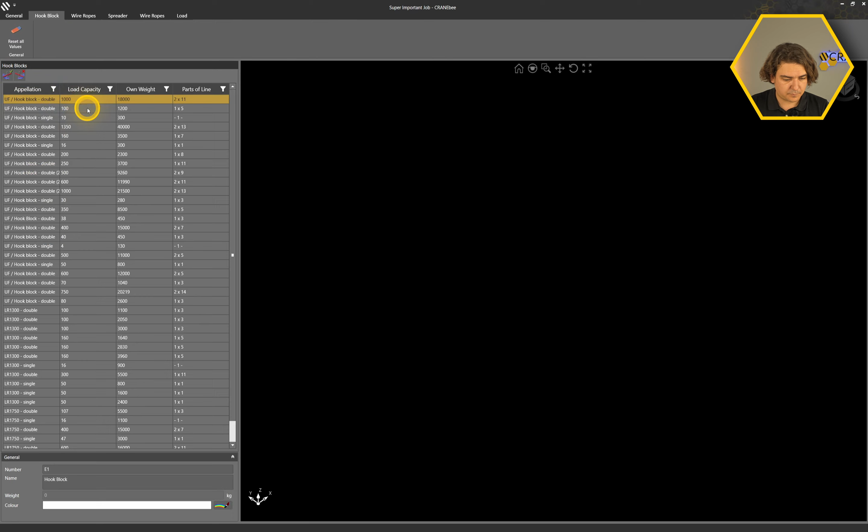And you see right away it will change the Explorer on the left. Let's start from the top to the bottom and then we do all step by step. Starting with the hook block. So there's a 450 ton crane. Let's put a 350 ton hook block on there. Yes, we can also put in a color. Let's make this one orange. And let's say we're done with this and move on.

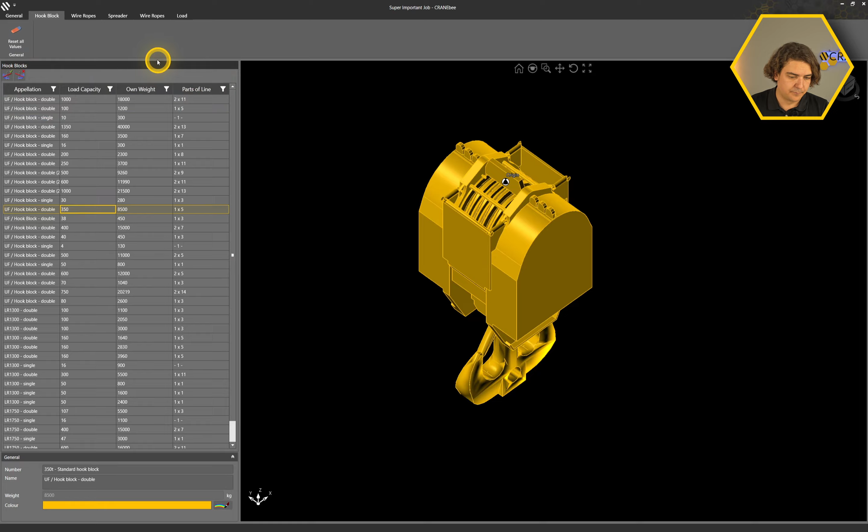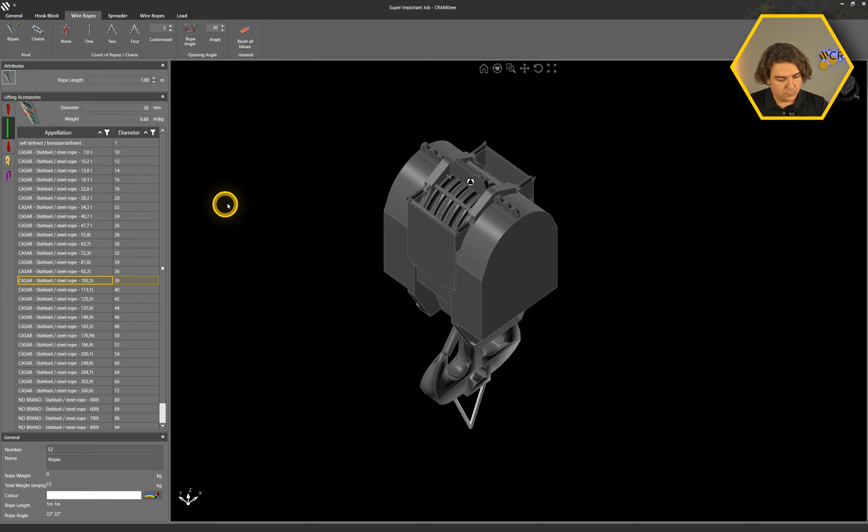By the way, if you want to rotate the lower part of the hook, you can do that up here on those little buttons. I keep them as is. Right. From this hook we have two wires. I'm gonna leave this very simple, so no additional accessories. I'm just gonna put in the wires. So let's put around 100 ton wires in. Doesn't show anything yet because we didn't select how many wires we want. In this case I want 2 wires, and you can see them down below connected to nothing yet. We can leave it like this for now and go ahead to the spreader.

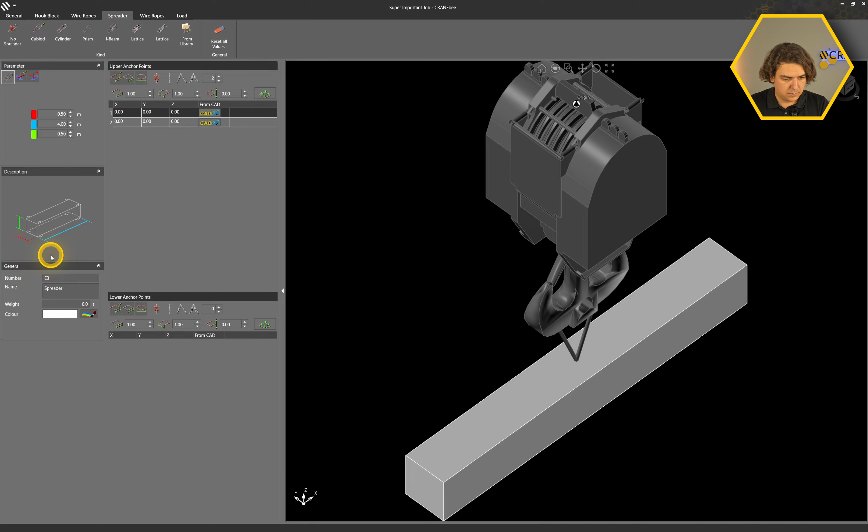Again, this spreader will be a very simple one. It's just a long cuboid, 0.5 and 0.5 as well. And I want to have both of my lines just at the top on the edge. So I'm going to put in, I want to arrange them along, and this is 4 meters apart, and click, and that's that. Again, as simple as possible at the moment.

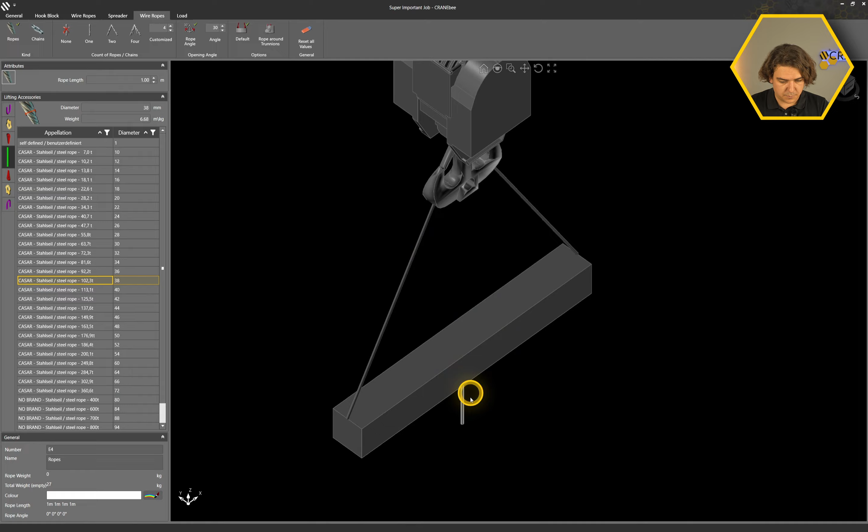And the wire ropes, which come between the spreader and the load, let's use the same, and in this case we need 4. They appear down below here as 1 at the moment. Let's give them a color as well, just so we see that a bit better. Let's take pink. Why not? And we get to the load. In this case, you can load up a load from the library, but I will only again use a cuboid here just to showcase how this is done.

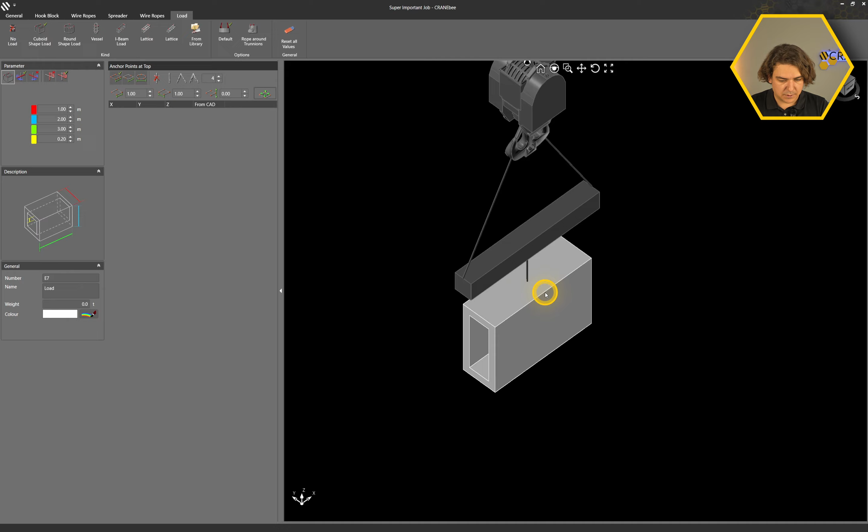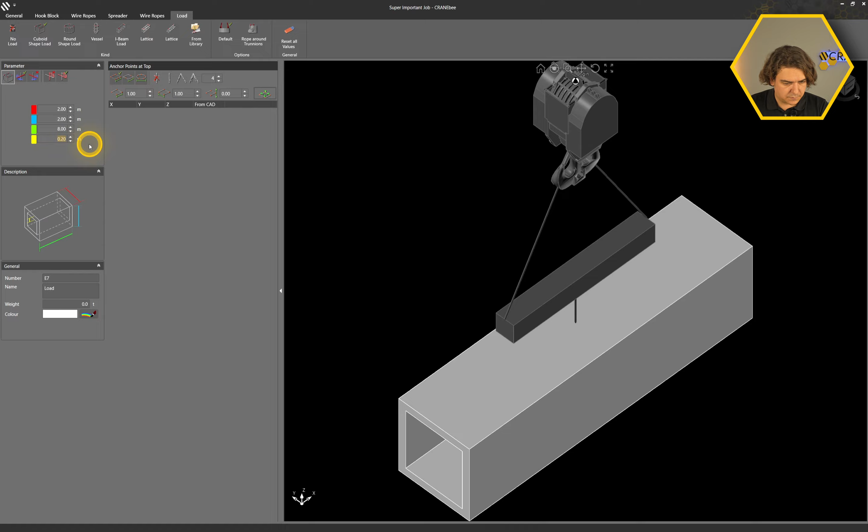And the other one was 4 meters. Let's say I want to have it 8 meters long. This is green. And about 4 meters wide. This is red. Oh, yeah, let's say 2 meters wide. I think otherwise it would get too big. And yeah, 2 meters height as well is fine. And let's put the yellow to 0, which will close it up, so it's not hollow anymore.

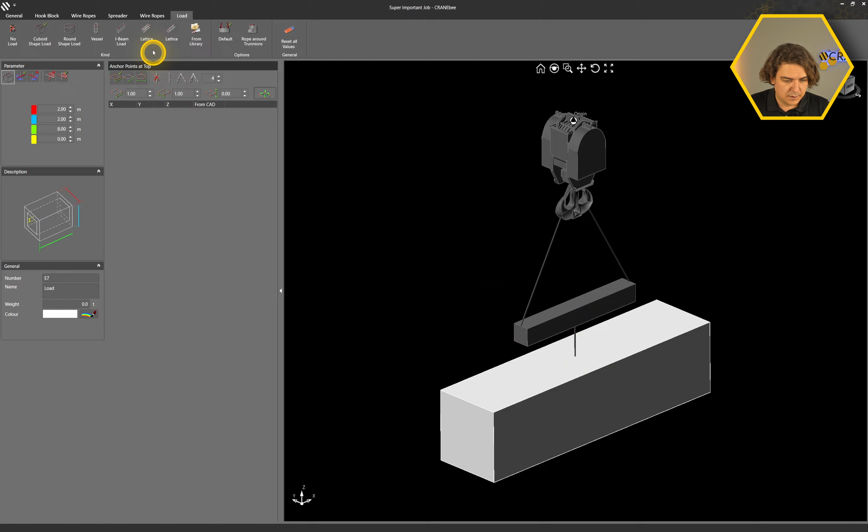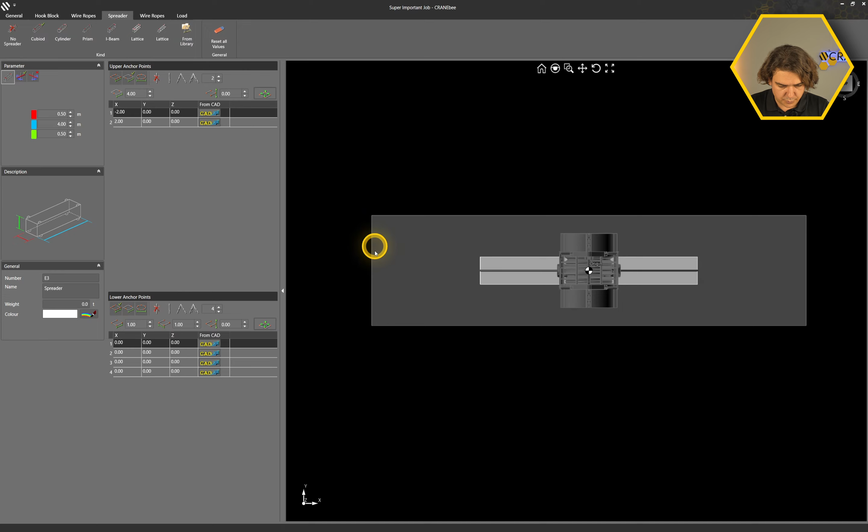Right, so we defined the load. We defined everything. Basically what we need to define still is where to put those wire ropes. When we go back to the spreader, you will see at the lower anchor points of this upper structure, in this case the spreader, we now have 4 different fields we can fill up. If we take a look from the top, we see that in the y-axis we have 2 meters, and in the x-axis it is 8 meters. So I wanna have this on 8 meters on the x and on 2 meters on the y. We leave z alone, and we say arrange.

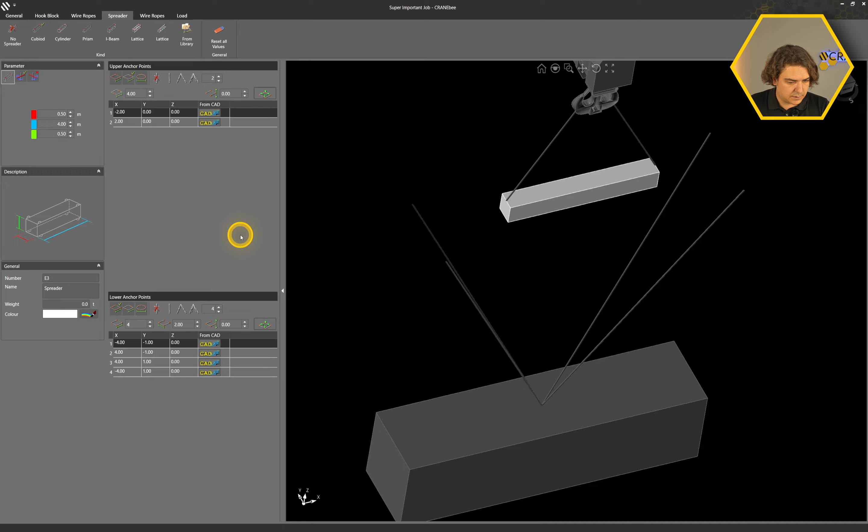And now I forgot I'm on the wrong part, so that's no problem. I had to put this on the lower part, but it's fine. You can go ahead and put in, again, this spreader is 4 meters long, 4, and half a meter wide, so 0.5. And we click arrange. And now we're going back to the load because we need to set the anchor points at the top of the load. In this case I got the right value, 8 meters long, 2 meters wide, and arrange.

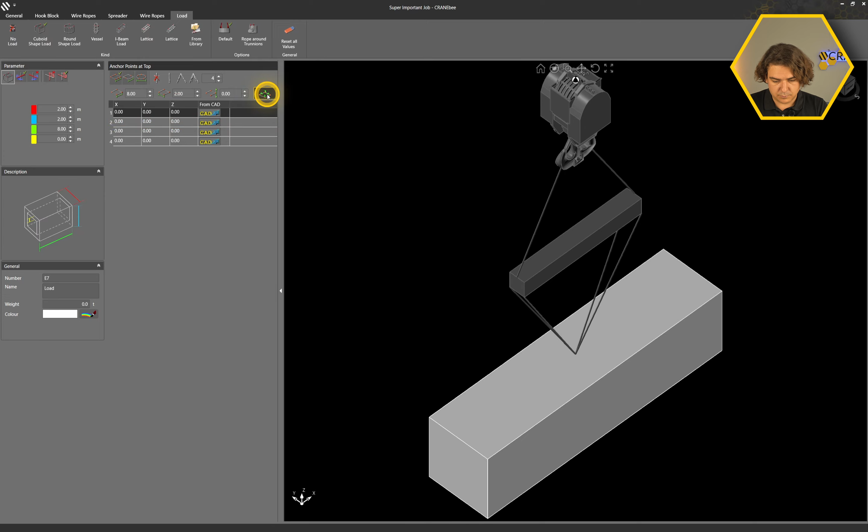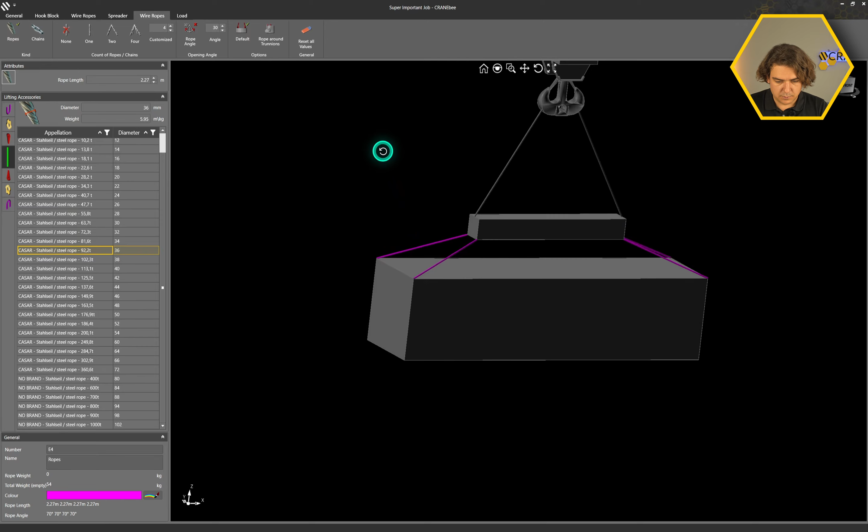Right, looking good. And then what we can do is we can go back to the wire ropes, and on the rope length we can click minus as often as possible. This will be kept at an angle of 30 degrees, as you can see up here. If I disengage this, I can go lower. But yeah, that's a bit too shallow in this case. So going back to 4, and yeah, we're fine. Right, when I'm finished with this, I can go back to general and click on accept. And the load will be put on our crane, as you can see here.

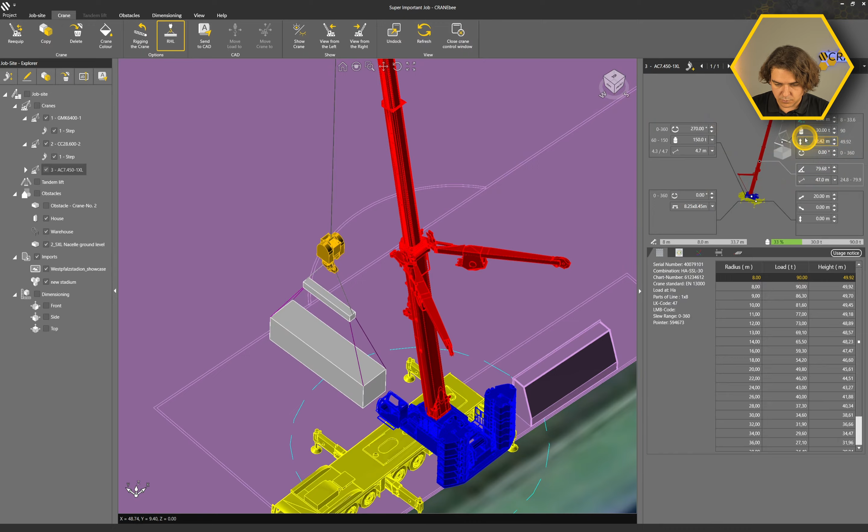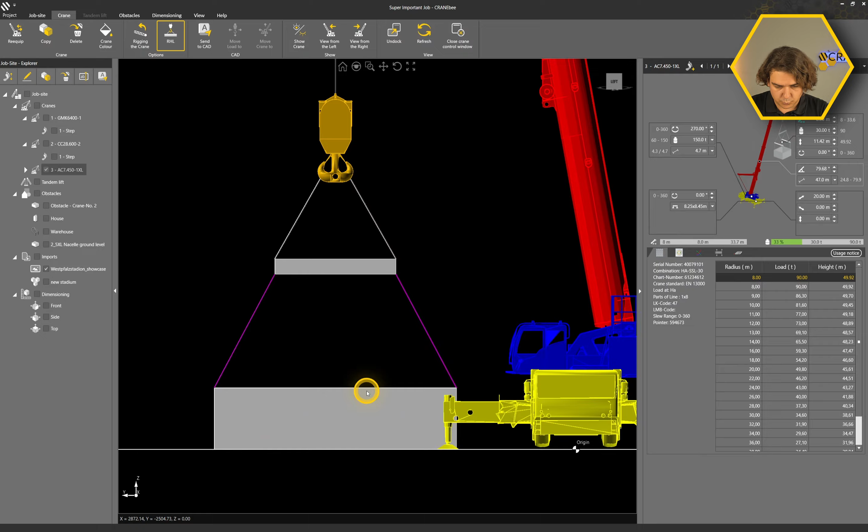It is also automatically lifted to a height that at least has the bottom of the load at 0. So when I go to the left view, let's get rid of all the other stuff so we can see something. Where's my stadium? There's the stadium. Oh yeah, sorry, the hook was at 1 meter before. 11.42 is correct. But I started with 1 meter, so that's why it was at the top.

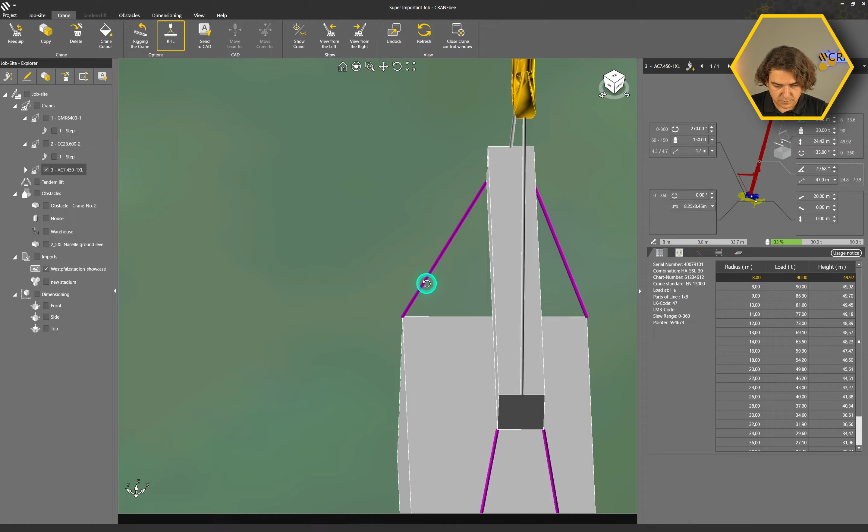Right, and then we can say, well, lift it up. And maybe turn it around a bit. Maybe put like 135 immediately, and you can see it will rotate at the lower part of the hook, not the hook itself. And that's pretty much it for the rigging, hook and load. Everything else is basically more layers of the same, so you have to go through there. But yeah, that's how it works.